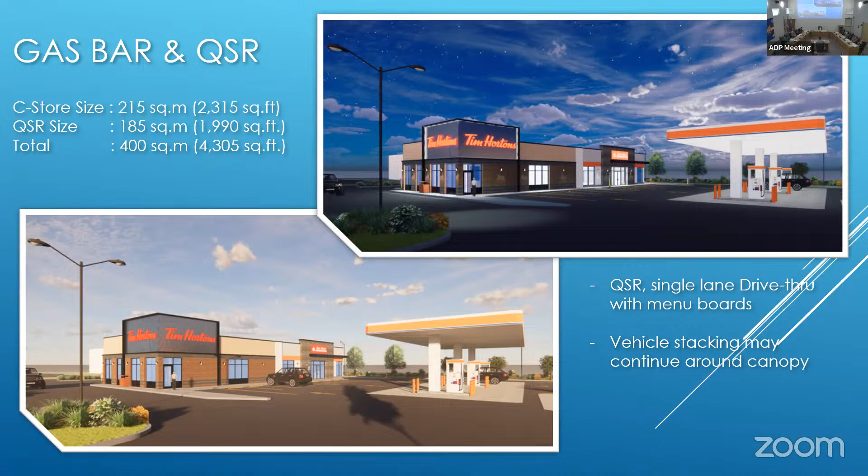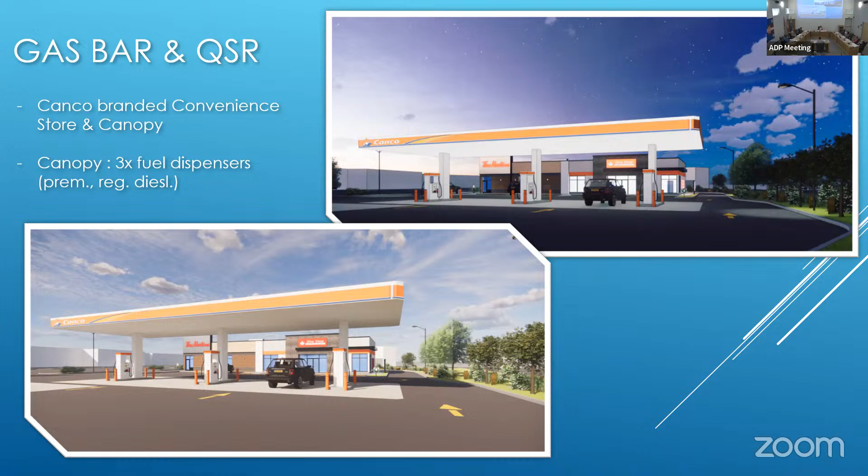One thing we wanted to consider with our site layout is vehicle stacking, given there's going to be a Tim Hortons here. When we think of Tim Hortons, we think of cars spilling out onto every adjacent road. Given the limited space we have, we wanted a reasonably sized restaurant and an accompanying convenience store. Tim Hortons wants a dual drive-through, but given the limited size, we're going to have to limit ourselves to just a single lane drive-through.

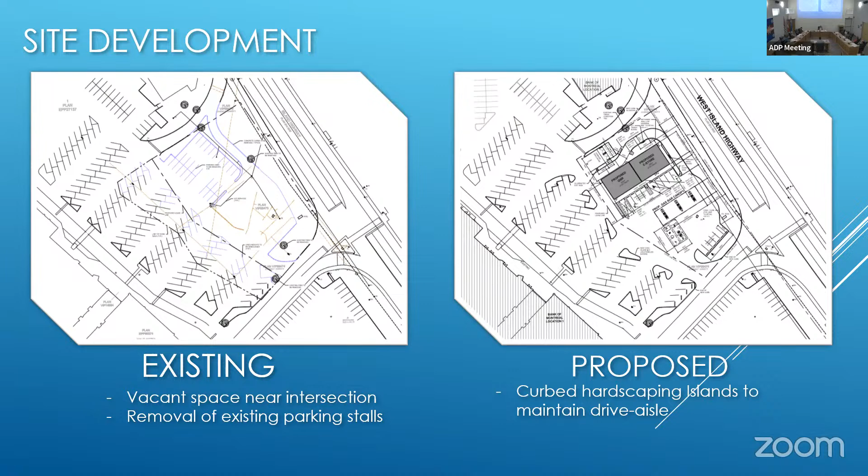So we can get right into landscaping and our approach with that.

Hi, it's Pat Campbell, PMG. The trees proposed for the mall are different than the street trees along the highway in front of Canadian Tire. Because the liquidambar styraciflua isn't technically xeric, we moved to hawthorn trees along this stretch of the highway. But we felt there was already a whole range of tree types in the existing mall—some dead, but there's sweet gum, liquidambar, ash trees, hawthorn trees, purple leaf plum. It's really not a mall where everything is the same, so we thought going with something different might give a different character to this end of the mall.

We're really concerned that they survive after a few years so you could turn off the irrigation and still have a healthy landscape. In the islands along the internal part of the parking lot, we've got a particularly drought tolerant maple species, a round-headed tree that will project some shade onto the asphalt. At the garbage enclosure, we have Douglas fir, which is also very drought tolerant. We have significantly sized islands so they can provide the trees with lots of soil.

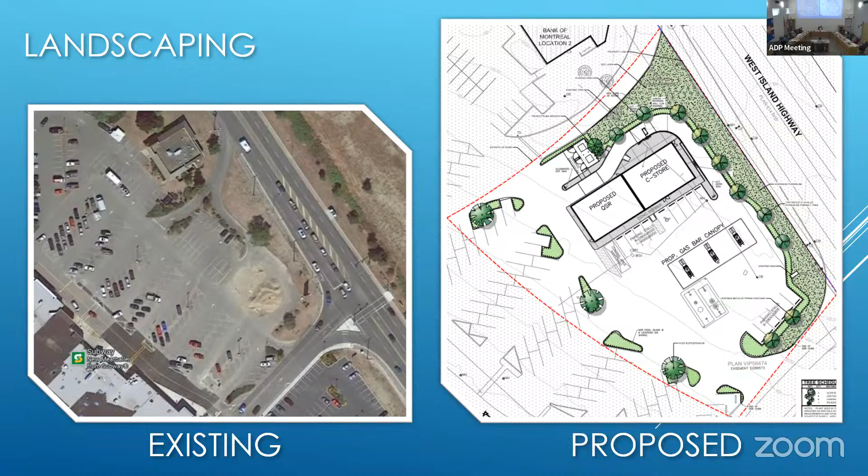Oh, sorry about that. Sorry, I meant this picture on the top right there, my apologies.

That shows a lot of the foliage that was recently done in the new Canadian Tire and the Save on Foods. The bottom right shows our intent, as Patricia was mentioning, regarding the extent of our landscaping.

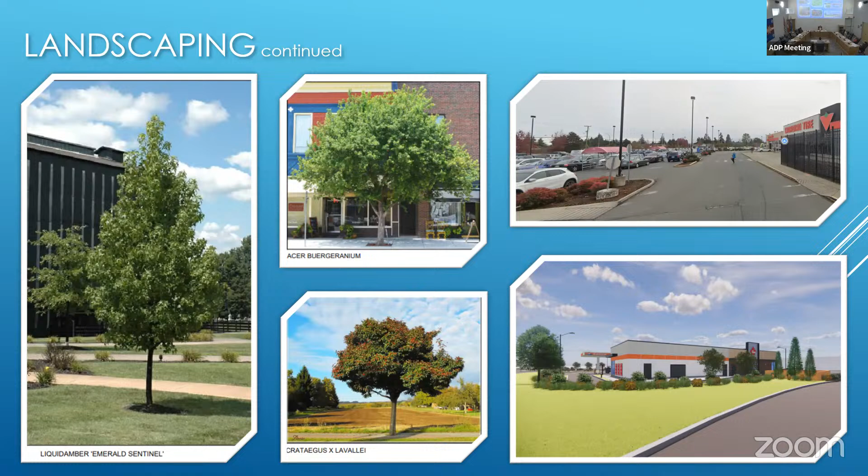You can see there's a lot of incorporation of reds and pinks that matches what was done in the existing Canadian Tire and Save on Foods.

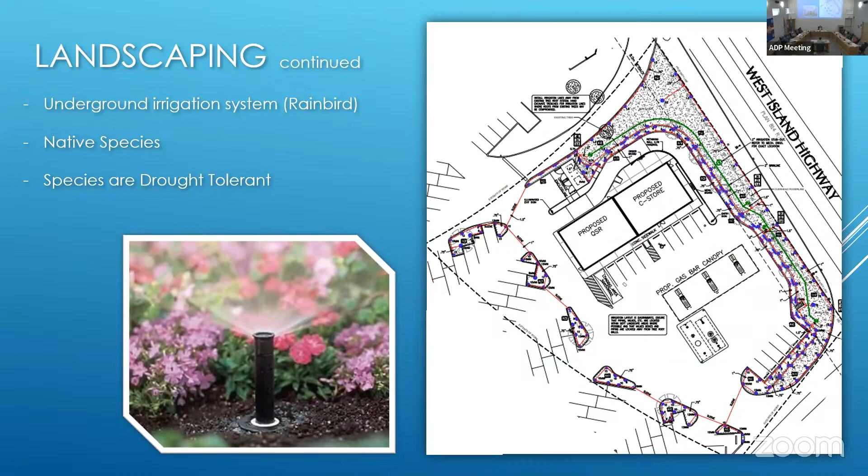There will be irrigation. There's an irrigation plan that we provided, with underground sprinklers that pop up to provide the watering required for these species. These species are all drought tolerant, as Patricia mentioned, so watering should be very minimal.

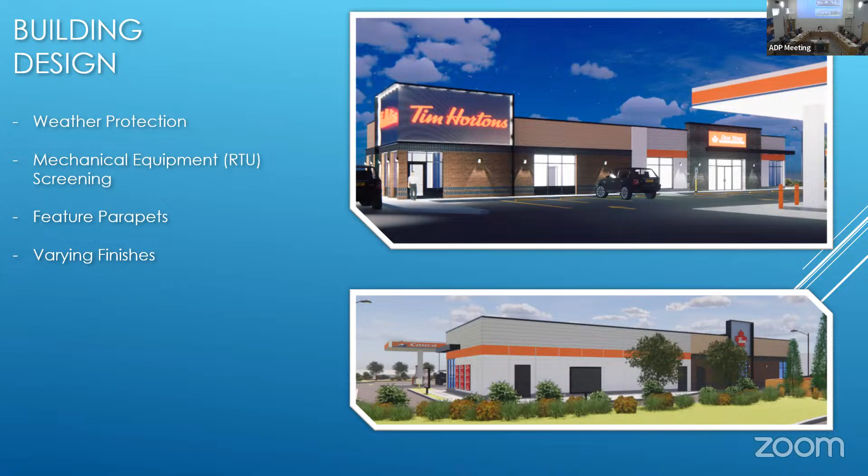As Adis was mentioning regarding the building design, one comment that Sarah and Kyle provided was weather protection at the entries. That's something we've revised. I don't show it in this rendering, but we now include a canopy that protects the entrances in our DP drawings.

I point that out because some other areas of Wembley Mall, like the Bank of Montreal, have stucco but also use a heavy amount of reveals. That's familiar with their branding, and the ice rink nearby also has stucco with a high amount of reveals, hence why we've incorporated it into ours as well.

We don't see it that much in this rendering, however we do see a lot of the horizontal siding used on the top here to incorporate that of the Happy Jack's nearby.

This is also going to be a Hardie fiber cement product, so there's not too much variation in terms of finishes because a lot of it will be Hardie siding, but they come in different products—horizontal metal siding, and also reveal panels. Those reveals will mimic what we see in Canadian Tire and the adjacent projects with stucco and a high amount of reveals.

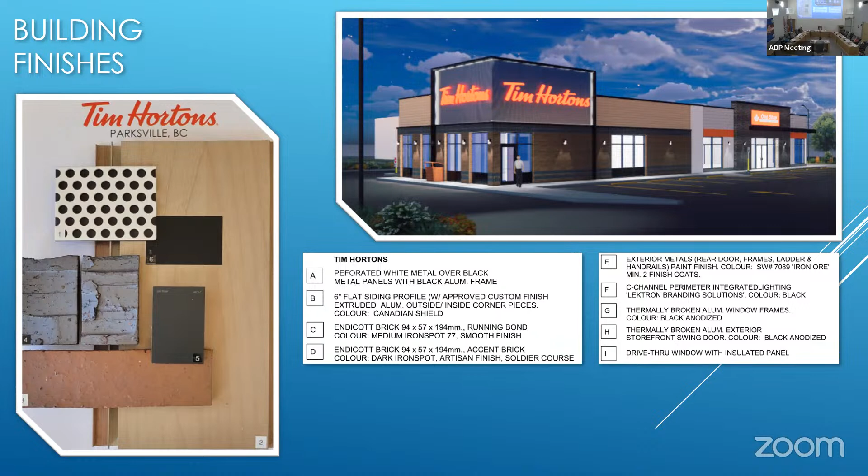I'll pass these finishes off as well. Sorry, the glue didn't hold. No need to get that.

One thing to point out that was introduced initially were these canopies that kind of wrapped around the building. We see it a little bit on the side here. That was actually intended to be a trellis, but Sarah made a great point that we want to protect the entrance. So although we maintain a trellis around this corner of the building, the front here will be solid, so there won't be any rain. It'll be protected from the elements.

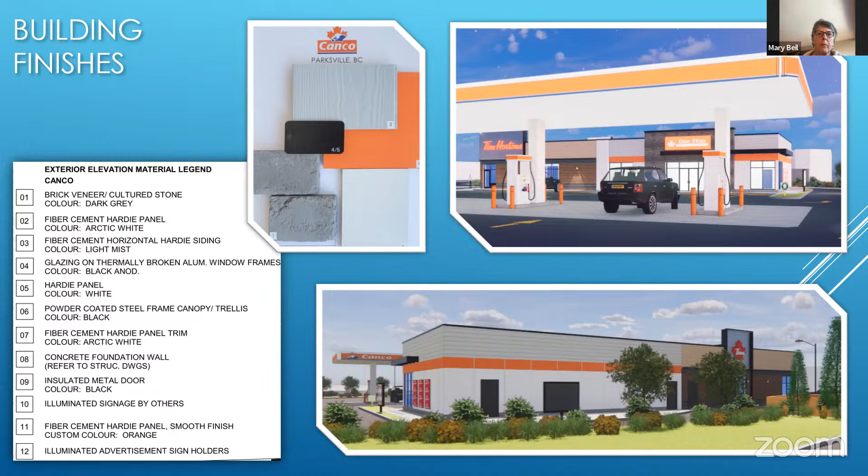Very preliminary right now, but this is the basic footprint of our store, of our building. That was it. Thank you very much for your time. Much appreciated.

Thank you very much for your presentation. From the chair to the city staff, I have a question, just as a reminder of how we normally conduct our meetings. Normally I have every panel member speak to their concerns or ask their questions, and then we summarize at the end. Okay, so I'm going to open it up to our panel members for their comments and questions, and I think they can speak directly to you, and if they have specific questions to answer.

And actually, I have one more question for city staff. I just wondered if you could remind us, if we are supposed to know, the influence of the building checklist on the development. I'm curious about how the scores impact the approval process, the development permit. So the sustainability and accessibility checklists were implemented by council several years ago. It predates my experience at the city, so I would say somewhere in the early 2000s is when they originated. They're there for council's benefit when they're considering the application, and they're also used as a tool to get the applicant to think about some of those options and ways that they can enhance their proposal.

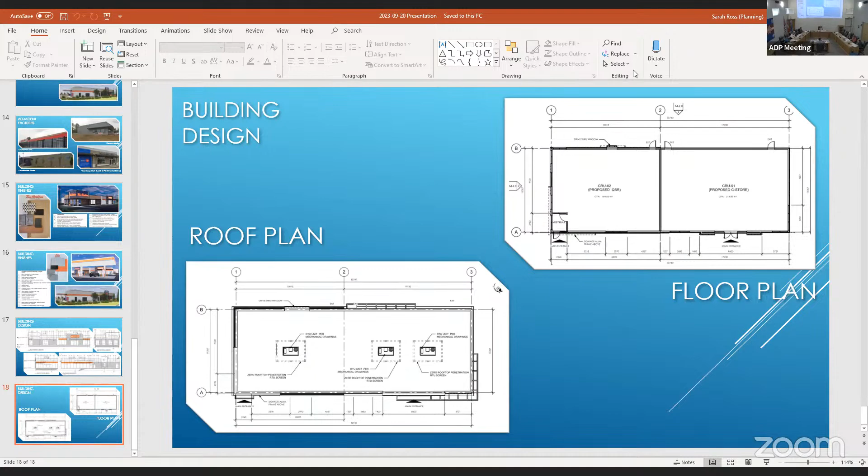Next question: obviously this is a gas station, with big trucks moving, bringing the petroleum. Can we look at the site plan? Because the majority of my question is going to be just about the site, so looking at the site plan is best. This one? No, the one that has landscaping, that's nicer to see. Yeah, that's the one. Has any turnaround study been completed for the trucks bringing the petroleum?

Yeah, go ahead, I can answer that question. Usually this is what we call a vehicle-oriented site. So we do have software which shows in real time how the truck is moving, since this gets the gas station mostly truck traffic.

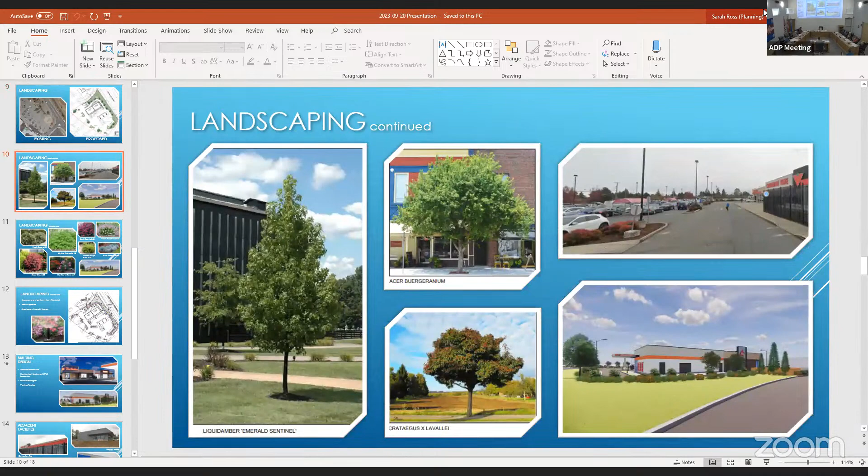First of all, you have two entrances where people are going to go, and people are going to go to either one or the other or both, and they may come out of one and go to the next one. And you mentioned about the canopy, where you were asked to provide a canopy for the entrance doors for some protection.

When I look on the drawings, the canopy seems not adequate. It just seems very short, like it might only be 2 feet wide. And in fact, if it's going to be a canopy, and we do have rain in this part of the country, I think it should be at least a meter or 1.5 meters even, because it does not provide any cover at all, especially for someone, say, in a wheelchair trying to negotiate the front door.

There isn't any space there. It's very shallow, and the same depth is on both canopies. Why wouldn't you consider connecting those canopies so you can actually walk from the C-store to the Tim Hortons undercover? What's the point of cutting it off? I think the logic in that is not thought through sufficiently. So that's one big thing.

The other thing is I was looking at the circulation on the site, and it just looks like it's going to be extremely chaotic. We have drivers coming from the highway and entering into the canopy to get gas, making a right turn into the parking lot, driving under the canopy, and then exiting on the other side where the other cars are parked in front of the Tim Hortons.

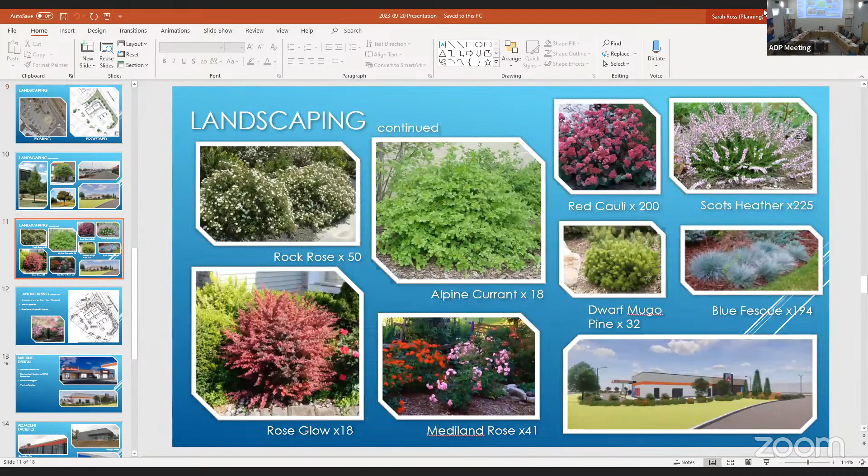In other words, if you're coming in through the main entrance to get gas, you'll see the front of the building. The other sides of the building present the back end of a building to the highway. If you're driving south, coming from Qualicum to Parksville, and coming into the mall, all you're seeing is the back end of buildings - and those buildings are located on the public highway in a very prominent location.

I don't think you've paid enough attention to how those buildings look, because it looks like you've presented the back of buildings to the public. This is the highway - this is not the back end of a building site. It's how you would approach it. And I don't think you thought - well, I shouldn't say that, you might have - but I think more consideration should be given to the way the buildings appear.

As if you were driving south from Qualicum towards Parksville downtown - if you look at that picture on the bottom right-hand side, you see a Tim Hortons sign, a logo, where it says 'oh, there's a Tim Hortons there.' You don't see anything else on this building. You get a clue about what it might be because of the Canco logo on the sides, but otherwise it really looks like the back of a building.

There are some blank entrance doors, there's no forgiving features at all, and I don't think it has addressed the presence it has on a main public highway. So I think you should think that one through a little bit more. And I agree with the comment from, I forget his name, Bruce - it would be good to thicken the extensions of those logo signs so there's a small return. That's a very good observation, so they don't look like a frontier kind of aesthetic, where it's just a flat front to the buildings.

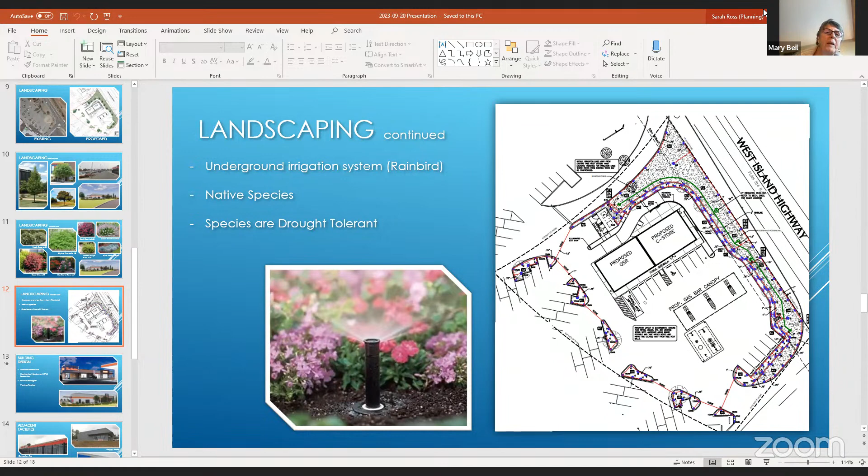And it looks like that's the case. Given the fact that area is raised, with quite a slope down to the highway, I would think that even a reasonably low sound barrier would go a long way to buffering any sound coming out of there. So I'm not 100% clear about where the speakers are, but I know it makes a huge difference. From personal experience, I've been able to influence that when things have gone in closer to my own neighborhood. So it does make a difference.

The bike racks, absolutely, I was wondering where they were. And we do have quite an active cycling group in the area, so not only a few, but they will come en masse to join for coffee someplace, so they might be visiting the Tim Hortons. And also the pedestrian access points, I agree totally about suggestions for wayfinding for vehicle entry and exit and the right turn only, but also for pedestrians.

I'm sorry, her name has escaped me right now, but starts with an M. Her written comments, she wasn't able to be here, were about having a second accessible parking. I was even wondering if it might make sense for that to be across, not right in front of the building, but over in one of those angled parking areas just by the buffer, where there's shown a pedestrian access point. I don't know if that links directly onto that sidewalk, or if that sidewalk has a raised curb, but if it could flow there, perhaps that would be a reasonable, nice spot for people to access with a handicap parking area. So I just wondered that, looking at it.

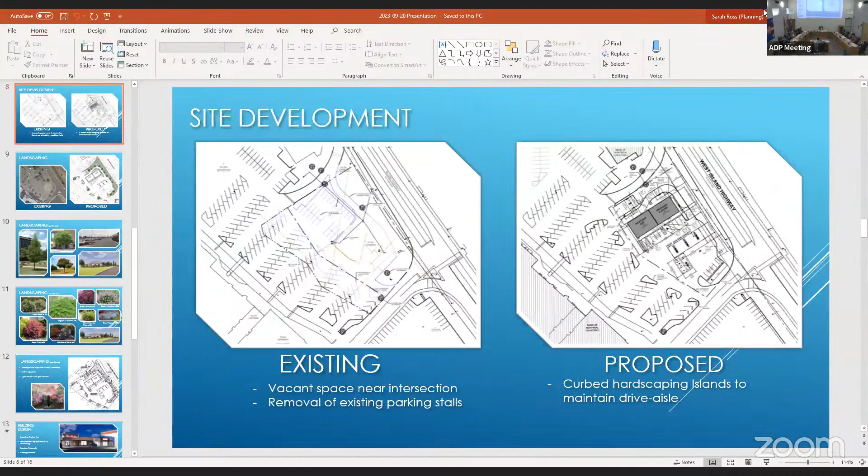One thing that Maureen brings up, and I'm also concerned about, is that none of us referenced the skating rink right to the corner. I think you're going to see your most traffic going from there to the Tim Hortons, so ensuring safe pedestrian connectivity from the ice rink to the Tim Hortons is really important, whether through safe crossings, marked crossings, or signage - that's where you'll see the most movement of pedestrians.

I also wondered - I think the site has a lot of room for more trees, and with our increasing temperatures, we'd like to see more trees because they help mitigate climate change issues. I think you have room for another layer of trees even going down that bank, which may also help mitigate the noise and work better with the back of the building.

So I could just see a lot more canopy coverage from trees on site. That's my only additional comment from what everyone else has said. So I think what we'd like to do now is consolidate our comments into very clear recommendations for staff, so maybe I'll open the floor to panel members.

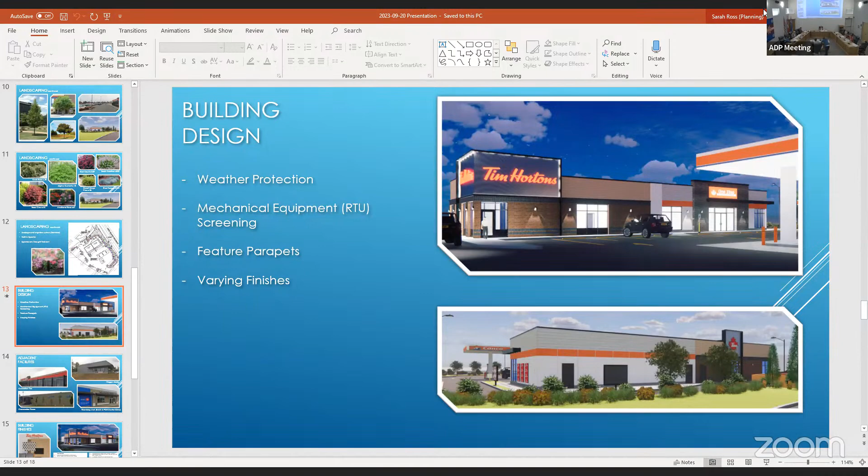In the Development Permit Area guidelines, there is a comment that building design should relate to an overall architectural theme. So we could say that the building needs to have a similar language, maybe within the differentiating—or does that make sense? It also says to avoid monotonous views. You can read that either way.

I think there's a happy medium that maybe is not quite being achieved. Do you think, panel? Maybe there just needs to be an architectural feature in there, a bit of stone or something that still divides them, but at least makes a bigger statement, a bigger line.

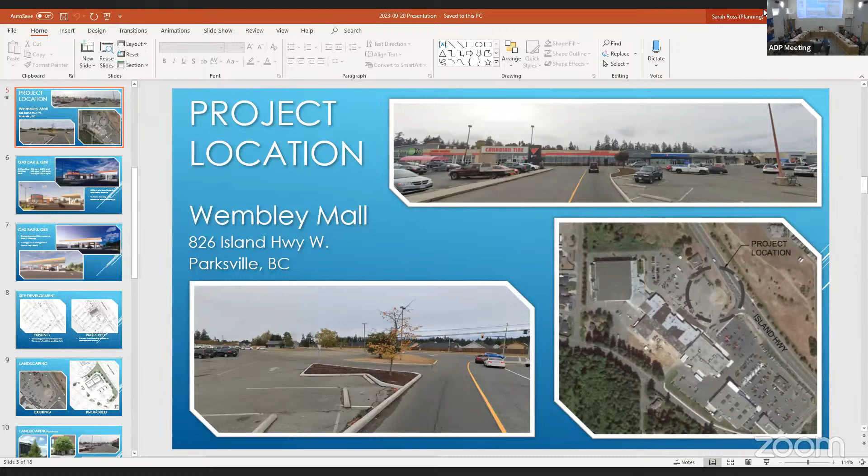You guys are the architects. I see your point, rather than it would appear to be just a line. Yeah, I guess to your point, at least a more profound feature rather than just a line.

Exactly. I'll leave that to you to do that. I don't want to be designing it for you or prescribing it. So Ian, I agree with your comment about the rear side of the building. It's kind of blank, and I totally agree. Just having something to spruce it up a little bit so it's visually appealing.

So that's a good comment. We can take a look into that. I didn't really state this earlier, but maybe right now, if the applicant could refrain from commenting just so we can discuss, would that work? Because I'm conscientious of the time, and I want to make sure we include all of our recommendations and comments. If we need clarity, is that okay? Because remember, they are just recommendations, so you will be able to respond to them as you move your project forward.

Dariush, I think you had something you wanted to comment? No, I just wanted to say, after all, we are recommending these things and giving these recommendations to you guys as a designer to basically review and go to what's proper for the project. So we're not supposed to design the project. You are the designer. We don't want to get into that.

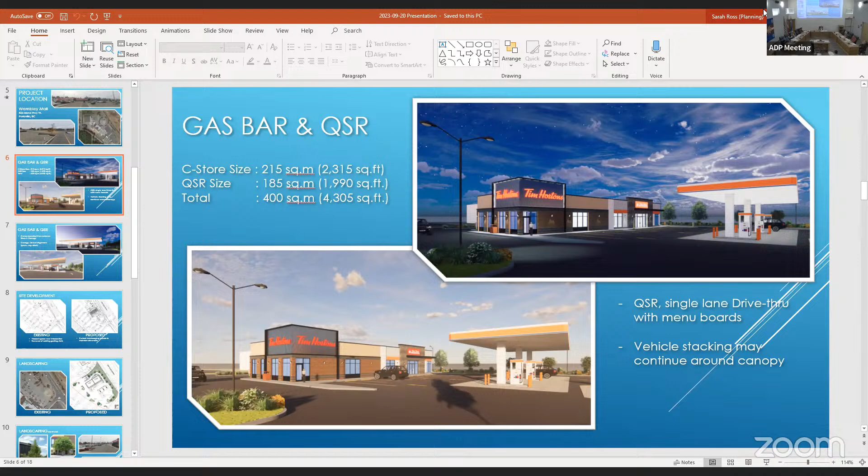Whether that left access lane into Wembley Mall off the highway could be closed off was beyond the scope of this project. That would be something the engineering department would have to weigh in on and have conversations with the owner of the mall if they're going down that route. So that's not something we had looked at.

Okay, thank you. Have we missed anything? Mary mentioned lighting, which is section 4B. So to ensure compliance, I don't know the rules around dark sky compliant lighting. I think some of your signage may not fall into that, but to be conscientious of it. That's probably under guideline 4B: luminaries shall be a full cutoff louver design that prevents light spilling onto adjacent properties. So yes, we'll make that recommendation.

It's already a part of the guideline. So we don't really have the technical expertise to evaluate their lighting at this point.

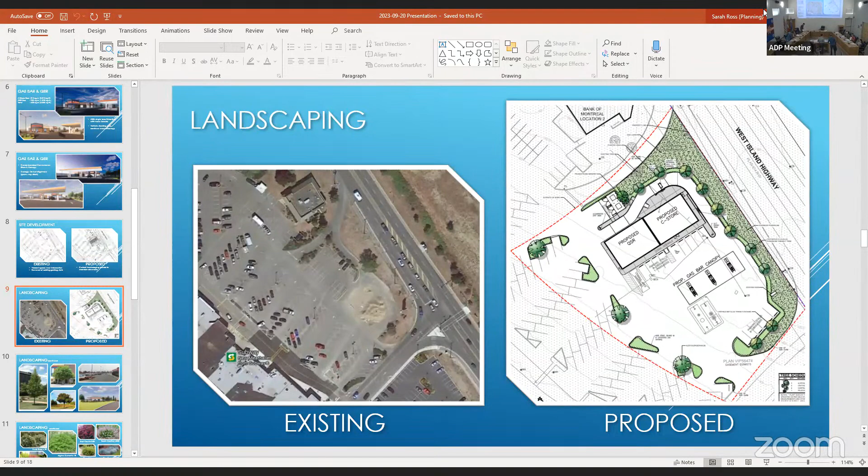Yeah, did you get stuck? Oh yeah, yeah, just - that's yours. Okay, that road, the paving - I don't know what they were doing, but it seems like there was...